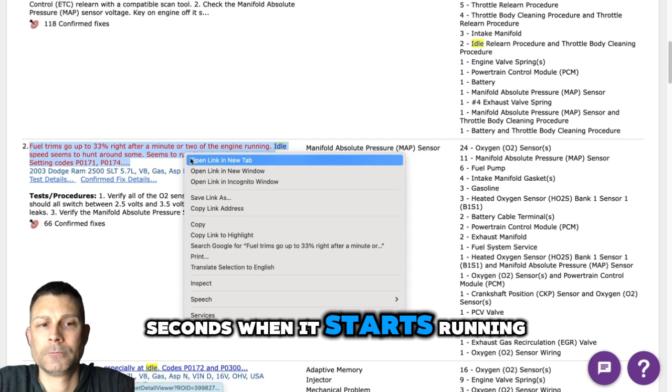So the P0171 is going to be a significant problem. That's going to be a lean code. We got a lean condition on our hands. The first thing that needs to be done is we need to smoke test this intake system using a smoke machine for vacuum leaks. So you've done that. There's no leaks whatsoever, correct? Right. Did you replace the oxygen sensors? No. So that would be the next step.

There's going to be either the oxygen sensor or what's that? Then I would replace both of them. How many converters do you have? Just one. Then you only got two. You need one before and one after. I've heard that the valve springs this particular year only are notorious for breaking, but this doesn't sound like that issue, does it?

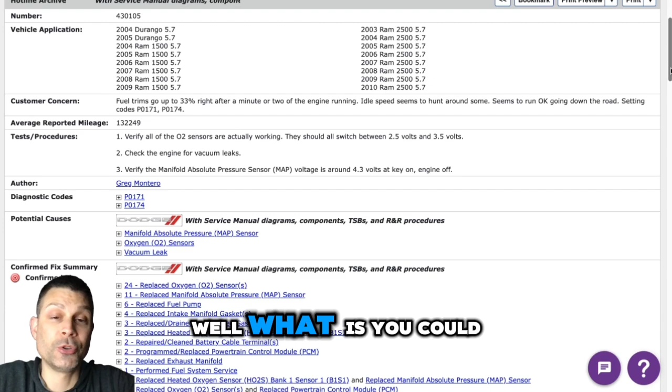Well, what you could measure, this is what I was trying to get to a minute ago, is engine vacuum. Now that we've confirmed there's no vacuum leaks, we can take a vacuum gauge and measure engine vacuum. When it's running at idle, it should be solid, steady, 19 inches. The needle shouldn't be low. The needle shouldn't be fluctuating because it's basically mirroring how the engine is breathing.

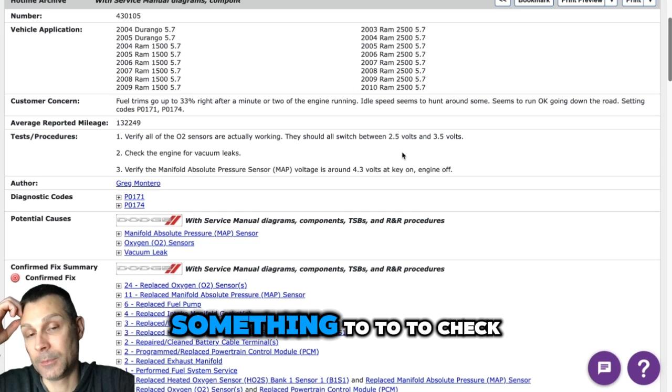And if we have a mechanical issue like sticking valves or anything with the valve train, it's going to show in the vacuum readings. So that would be something to check into. You can also check the MAP sensor and make sure it's reading correctly, or you could even just replace the MAP sensor. It does go bad quite often, causing this.

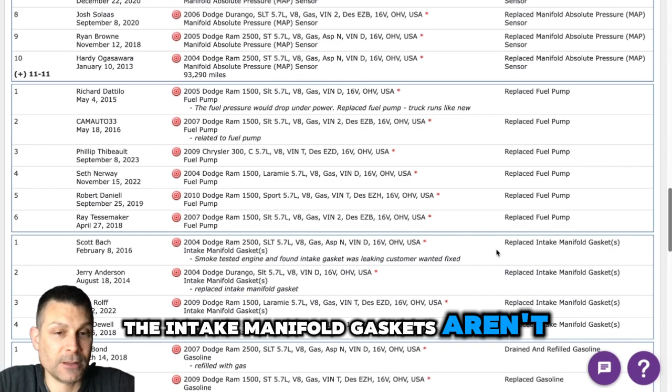And you're sure the intake manifold gaskets aren't leaking? They don't appear to be. I've done the smoke test, but I've also sprayed WD-40 or something around everything. And I've got no oil dripping down from the covers either. So you can check the vacuum first before replacing the oxygen sensors. You could check to make sure that the fuel pressure is good. So take a look here real quick before we get to the fuel pressure.

Now that I think about it, if you only got two oxygen sensors and one converter, that means you got one oxygen sensor before, one after. So it doesn't sound right. Let me just take a look. 2500, 5.7. It does only have two. So I wonder how in the world it knows. The question I have is, how does it know bank 1 and bank 2 are lean? That was what I was wondering.

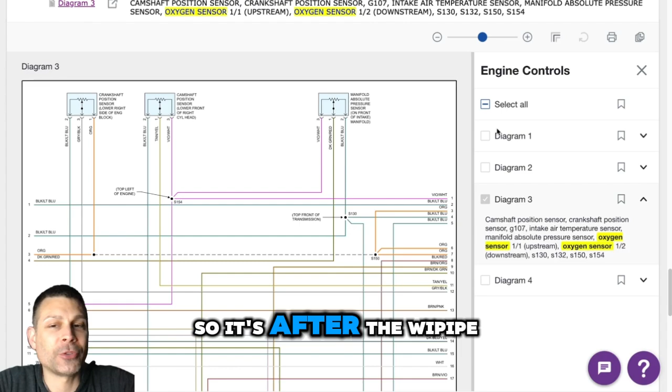But it's after the Y pipe that they're both at. So it's after the Y pipe, so it can't differentiate between bank 1 and bank 2. It just knows that the one sensor before the converter is lean. That makes sense. All right. Are you sure there's no exhaust leaks? No, there were at first when I got the truck. I corrected them. Now I don't have any exhaust after the converter.

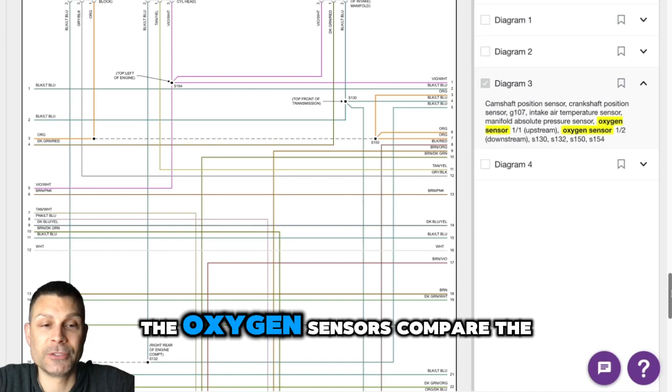How far away is the exhaust that comes out of the converter from the last oxygen sensor? Right there. Well, that might be a problem. Replacing the oxygen sensors, even both of them, may not resolve the issue, because I'm not an engineer, but from what I understand, the oxygen sensors compare the exhaust gases in the exhaust system to the outside air. So if the exhaust is not exiting at the back of the vehicle, it's right there, that could affect the readings. I haven't seen hard evidence either way, but in theory, that's how I understand it works.

So you could try, as long as there's no vacuum leaks and the vacuum itself checks out good, you can slap a couple of oxygen sensors on there and see if that does the trick. If not, you may have to put exhaust on the rest of the vehicle and see if that takes care of it. Take a look here. 49 PSI plus or minus 2 PSI. All right. Well, I'll check these things out and see what I come up with then.